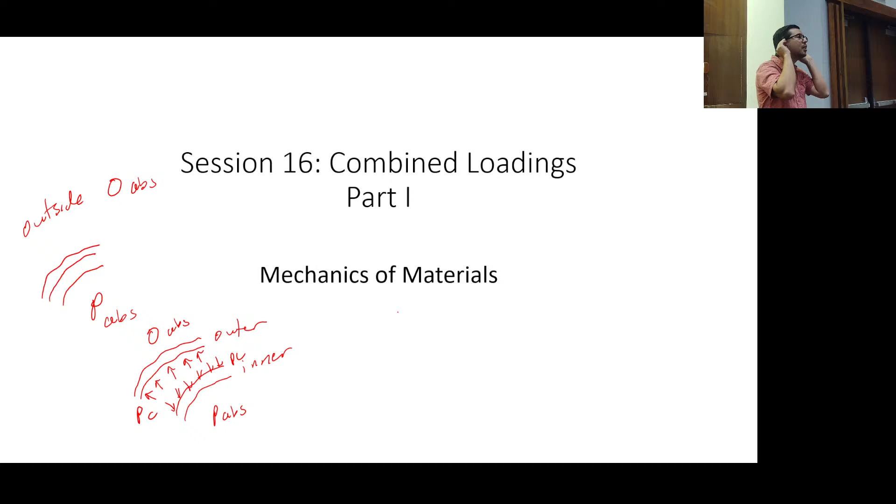Why didn't you take the absolute pressure on the inner cylinder and subtract the PC from that instead? Good question. That's where it comes down to a definition of context. Or I could see you thinking the gauge pressure is really P minus PC. Well, if you had a gauge, it's going to be hard to measure that interface pressure. But I could see how that's confusing.

And that's why I'm trying to say, the way we're defining the gauge pressure, it's between the inner of this system and the outside of the outer cylinder. Good points. All right, any other questions? All right.

I like that word, all right. And I like ums. We have maybe one of the hardest conceptual lessons today that we're going to cover. Again, it's okay if this material looks a little bit new, it's okay if we don't get it right immediately. We can discuss it in further detail, and as I post some of the videos for the examples, some of the concepts will be simpler.

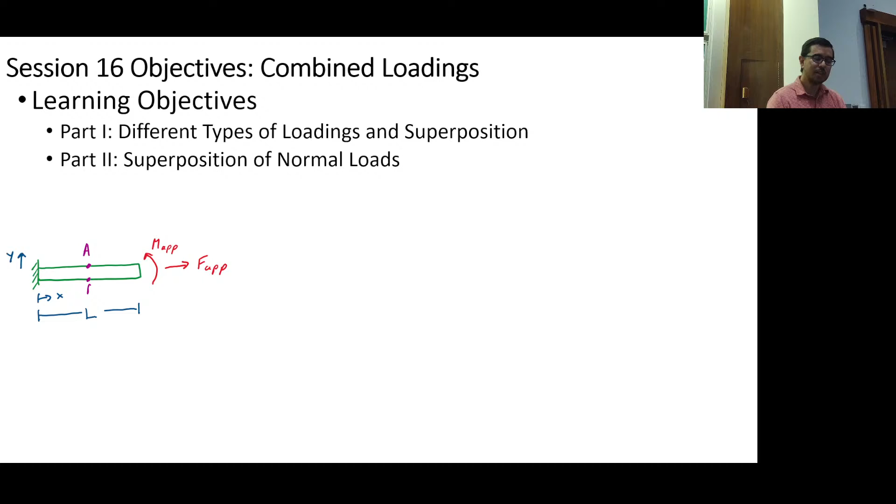It's a key session though, because what we're going to do today is combine the different types of loadings we've been looking at, using superposition. We're going to be looking at normal loads, shear loads, and normal and shear loads together. This session doesn't necessarily tell you will it break or not, that will come later. All it's trying to do is figure out what the tensor looks like at a given location.

The stress tensor is what I'm talking about. So today we're saying, I know that a bar that's uniaxially loaded has one sigma, one normal stress, one axial stress, right? What we're saying is now when we put multiple loads on that bar, or on a structure, it's not just sigma x. You already knew this, you already knew beams are going to have transverse shear stress potentially and some bending moments or bending stresses. So you already kind of knew this. Today is the time where we formalize it.

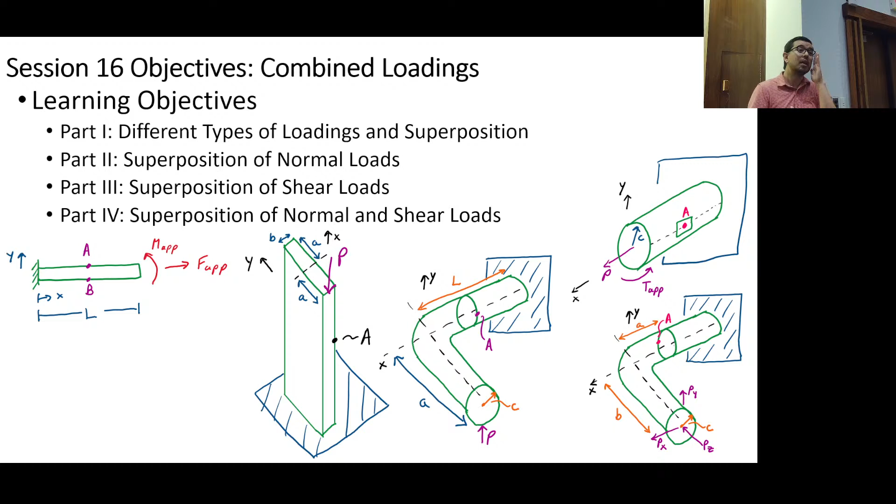So our goal is to essentially populate the stress tensor. I don't really say that explicitly in the slides, but that's maybe one way to say it. So let's check them off: do I have sigma x, sigma y, sigma z? Do I have tau xy, tau yz, tau xz? There's essentially 6 options, and most of them are going to be zero, because we're still kind of working in 2.5D. The goal is to figure out how those individual configurations with loading and geometry end up resulting in the particular stresses that we care about.

And so these are some drawings of the types of systems that we're going to be analyzing. You're like, hey, these don't really look that different than what we've been doing. And they aren't, you've pretty much, I mean, maybe this one right here.

Let's see, maybe this one, like that's not working. Come on. Why is that not working? I think I know why it's not working. Hold on.

Okay, maybe this one right here looks a little bit different, but these others are pretty straightforward in that we've dealt with them. This one is a little bit different because it comes off at a right angle. But that's a configuration we'll go into.

So you have, the answer here is either normal stress or shear stress. Okay, so tau xy, tau yz, tau xz. That's it, we have normal stresses and we have shear stresses, or we have both. So back to this question: if it's a torsionally loaded rod, what type of stress are we dealing with?

Exactly, okay. This is not going to make it, this has too much wind resistance. All right, so maybe Brennan, if you can pass it over. Oh no, all right that was way off, I thought I was doing better. I haven't figured out those, but I hope he can make it over to you. All right, and then what else? What else? Oh, you have good aim, you should be doing this. All right, what else?

Yes, okay so distributed, yeah that's a distributed load, right, is going to be for a wide variety of systems. That could be on torsion, on a rod, okay, that could be on a beam, it can even be on a bar, right. We saw how gravity affects our integral of p dx over EA, right? So that's kind of a type of external loading, shall we say.

Okay, that's fine. Yes Michael. Axial loading, huh? Axial, okay we already said axial loading, okay that's okay, give me another one though. Twisting, we already said twisting. Okay, pressure, yes like a pressure vessel, yes that's kind of the other one we could be dealing with.

All right, so pressure in a vessel, a thin wall pressure vessel, and then what types of stresses does that induce? Not compressive usually, huh? So here, what are you going to say over here? I'm sorry, huh? No, not shear, not shear, not shear. We're talking a thin walled pressure vessel.

Who said hoop, there it is? Where, hoop? Oh, there's no way. Come on, I'm going to hurt. By the end of the class, I will be able to throw it up there, I think, but right now I cannot. Yeah, oh actually I could. Okay, that underhanded.

I have been teaching the wrong way, I see. All right, okay, so anyway. Wow, that's really embarrassing. Okay, anyway, so hoop stress and longitudinal axial stress, okay?

There's one other thing - yesterday I almost brought in some tree clippers, because I was thinking these are excellent examples of shear. I was thinking about how we talked about single shear. I think in the future you should talk about single and double shear before torsional shear, because that gives a nice example of shear stress - force over an area, giving you an average shear stress.

So those are the different configurations that we've discussed. Let's see if I forgot any, or if I don't line up with my slides here. Okay, yep, I think that was about it.

So we've actually done quite a bit if you think about it. You came into the class and we didn't even talk about stresses in another class. Now we have this toolkit that says I can calculate, at least for these simple configurations which are present in a lot of the devices and structures we see in the world, these different types of stresses.

So what we're going to do today is say, hey, what happens when you have multiple loads or a configuration that can induce these different types of stresses simultaneously. That's all we're trying to do. And then we got to keep track - it's really an accounting problem. We got to keep track of the different types of loads.

If we go back to the first class, we said that if we had a bar, and if we also talked about beams and rods, we figured out, hey, what's the maximum supportable load? We didn't go into any of the physics or the calculations of stress - we just said, this is the rule for now, we'll explain why.

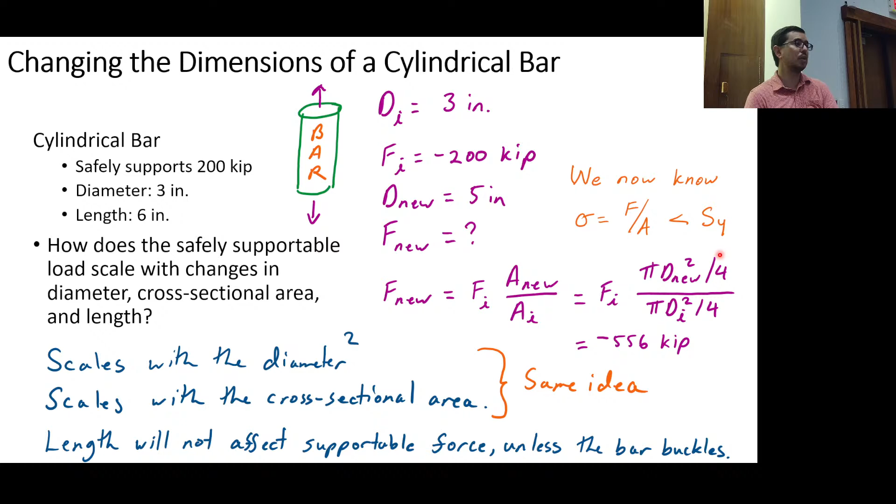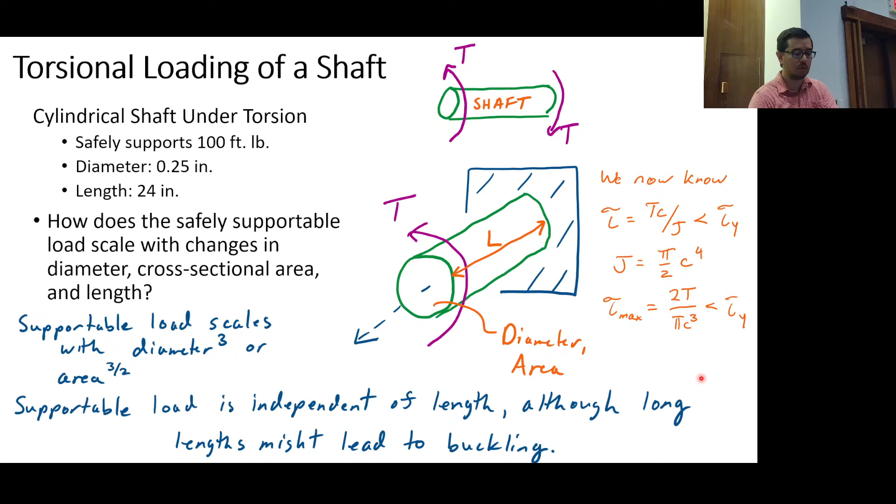And if we're considering the max, and we know it's cylindrical, then we can calculate J, that's pi over 2 c to the 4th. We can get another equation there - that's also got to be less than the shear strength.

For transverse loading of a beam, we said this in the very beginning - we had that the supportable load scales with h squared, scales with b, and scales with 1 over L. We now know that sigma is equal to negative my over I, and that has to be less than the yield strength in order for us not to have any yielding and not to have failure.

And we can break that down a little bit further, and we can say, okay, this is what the sigma max would be for the system where we have a force being applied on the end. Notice I didn't say anything about the...

transverse shear strength here, or the transverse shear stress, because as we described in the assignment a couple classes ago, that typically is much less. The shear stress is typically much less than the bending stress. It has to be a very narrow or very short beam for us to be thinking that shear stress is going to dominate the failure.

So coming into this, we can see that the supportable load does in fact scale with h squared. We see it in the denominator here for the sigma max. The supportable load does in fact scale with b, we can see it here. And the supportable load does in fact scale with 1 over L. If we increase L, the bending stress is going to increase and we get closer potentially or exceed the yield strength of the material.

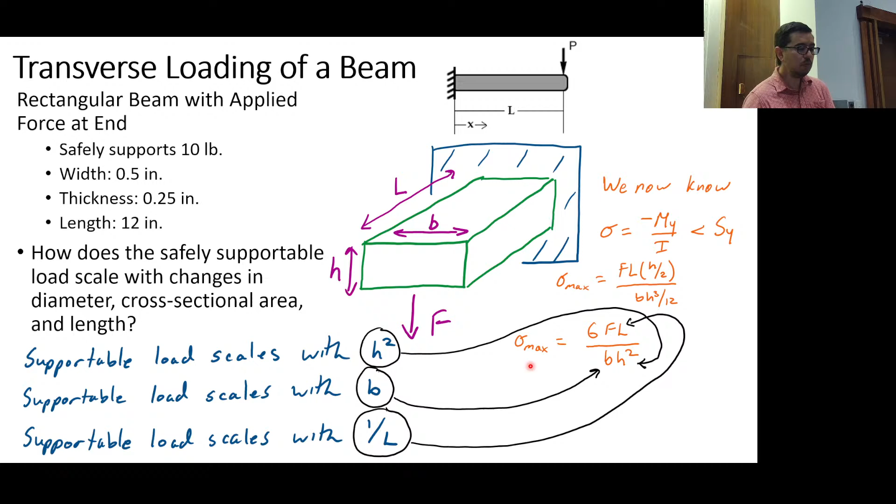We've also spent some time on superposition. Now the superposition we were talking about has referred mostly to combining forces to figure out what the combined displacement might be. Of course, you can also combine forces, especially if they're in the same direction at the same location, to figure out how you would add the stresses together too. Today, maybe it'll be a little bit more clear on how we handle situations where we're adding another load somewhere else, and we use superposition to figure out what the new stress is, right?

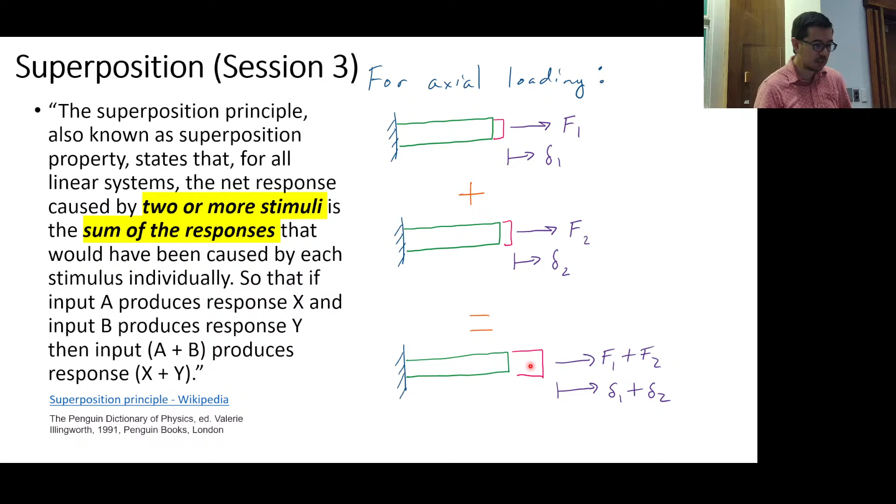So here, let's just kind of review and take a look at what Hibbeler instructs us in terms of superposition of forces and stresses.

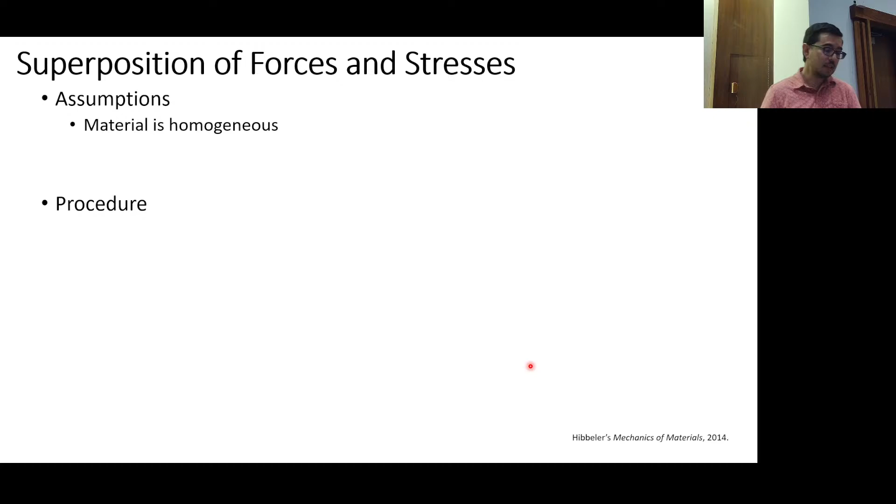We're making some assumptions. One is that the material is homogeneous. Another is that the material has a linear elastic modulus, and we're also kind of making this assumption that the deformations are small.

And so the kind of classic example of where beam bending fails is for large deformations. Let me see if I can get this to work. If we have something like a beam and we're loading it with a force P on the end, right? We're saying that P is more or less going to be vertical the entire time we're doing this loading.

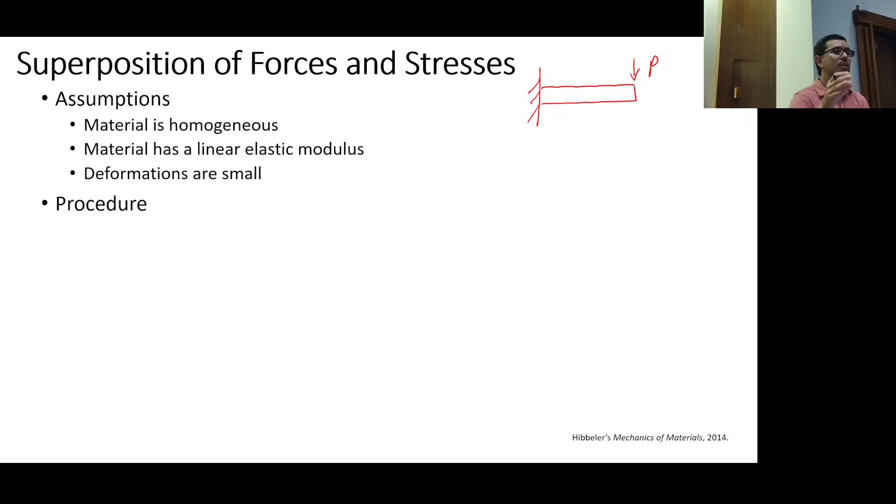But later, when we do beam bending and stuff, we can calculate the deflection. And if you have something that ends up looking like this, well, that's really bad. You have questions: is P still going downward? Is it still vertical? Did it go with the end of the beam?

Okay, these types of questions affect the answer you're going to get. They affect the linearity of the results, and they also affect the assumptions and the mechanics we use to derive either the deflection equations or the stress equations. So for large deformations, there are analytical responses, but again, that's where simulation might play a beautiful role as a tool. We're sticking to the simple configurations.

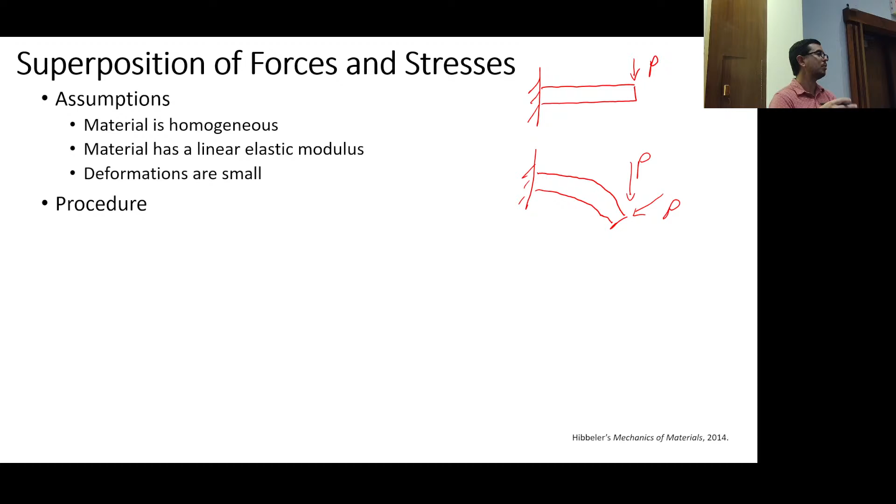As you already know, these simple configurations are enough to keep us busy. The general procedure has been to use the method of sections. Right now, method of sections is everywhere. It's in the pressure vessels, it's in the bars, it's in the rods, it's in the beams, it's in the trusses. Method of sections is critical to being able to understand what the internal loading looks like.

It may still seem weird to have this internal force, or weirder or stranger or more difficult to understand the internal bending moment. The thing is just to back it out, even if it's conceptually a little bit difficult. Just take a breath and take a look and say, I need equilibrium to be satisfied. I know what external equilibrium looks like. Just pretend you're doing external equilibrium, but with a slice.

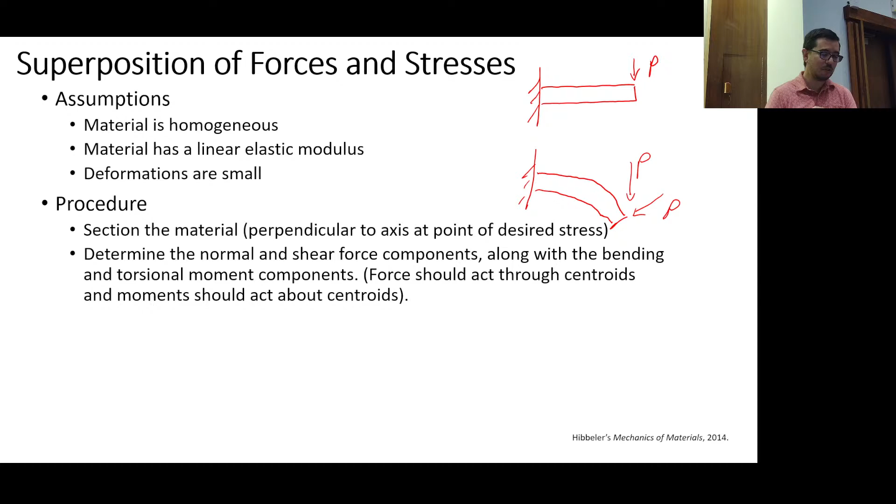We have to determine the normal and shear force components, along with the bending and torsional moment components. Forces should act through centroids, and moments should act about centroids. We'll talk about actually a counterexample to this force acting through a centroid in a second. We've got to determine individual normal and shear stresses for each type of loading: normal force, shear force, bending moment, torsional moment, and thin-walled vessels.

Okay, so we've got this whole toolkit now, and we look at a problem and we're like, okay, I now know what type of system I'm dealing with, and I can go ahead and figure out the internal stresses. And now you've been waiting for this for a little while, but we can finally add the normal stresses to each other. Okay, so you're like, phew, finally.

You're telling me, because I've been saying, be very careful with equilibrium, right? So what we're saying is, if you're at a given location, you can add those normal stresses to each other if they're in the same direction. Would you add a sigma x and a sigma y together? Of course not. Do those sigma x and sigma y have an effect on whether or not the material will yield? Absolutely. We haven't gotten to that step yet. But if it's at the same location, in the same direction, and the same type of stress, we can add those to each other.

Would you add a tau xy and a tau yz to each other? You might think about tau xy equal to tau yx. That is true. But when we do superposition, we've got to make sure that these stresses are the same type and in the same direction and at the same location, or on the same face.

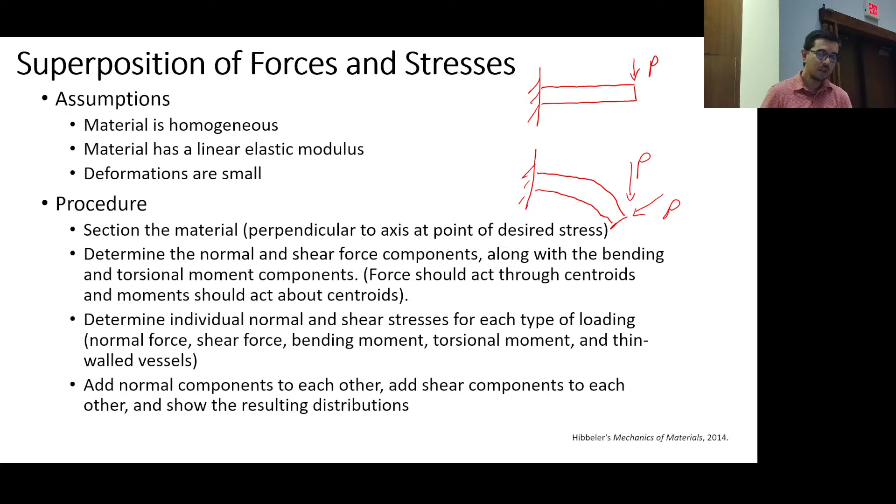So let's do a little bit of true and false. Statement number 1: a bending moment and axial force might both contribute to a normal stress. Is this true or false?

Yes? True, it's true. And I didn't say how is that? Why don't you explain that, Mark? Well, an axial force already, in its nature, contributes to a normal stress, and then a bending moment creates a bending stress. Yeah, that's right.

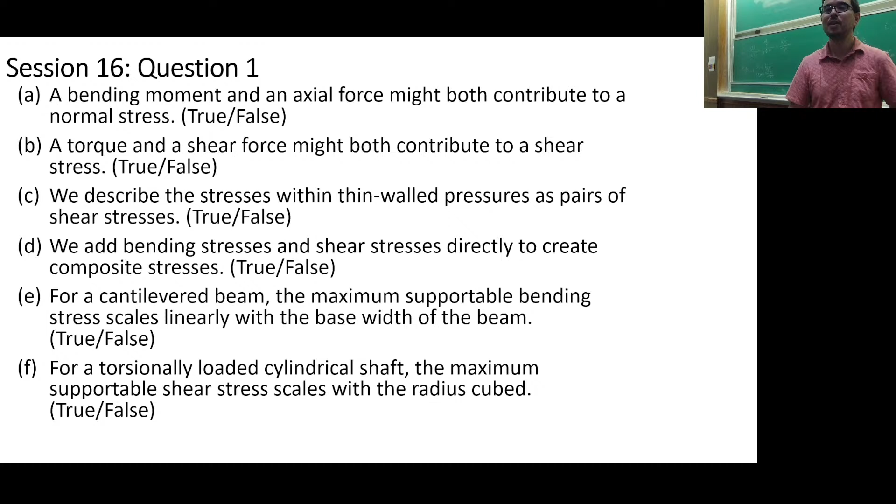This is the penultimate, all right, so I only got one more. A torque, so this is true, let's just mark that down as true. Okay, so that's true. A torque and a shear force might both contribute to a shear stress.

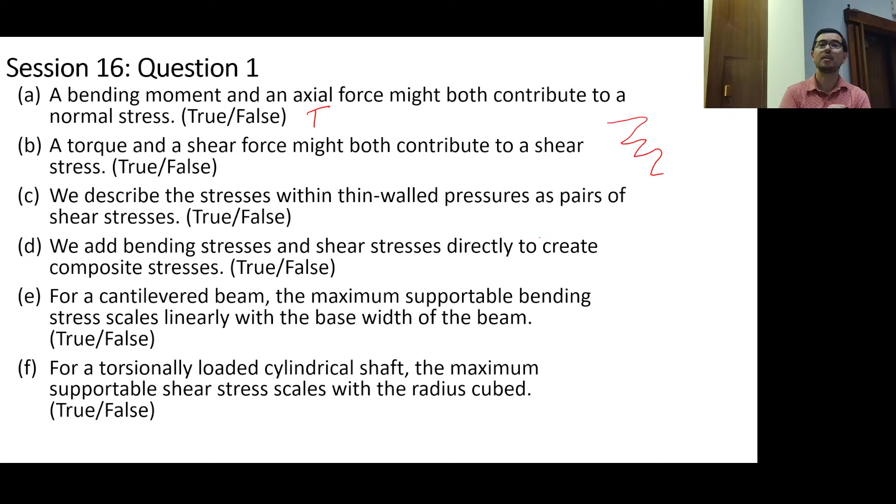Yes? What? How so, Stephen? We already know that shear force will produce a shear stress, so even if the torque doesn't produce any component. Okay, good.

Okay, we describe the stresses within thin-walled pressure vessels as pairs of shear stresses. That's false. Who said that? Okay, yes, thank you.

We add bending stresses and shear stresses directly to create composite stresses. What's that? Also false, right? Okay.

For a cantilever beam, the maximum supportable bending stress scales linearly with the base width of the beam. True, right? We just said that. And for a torsionally loaded cylindrical shaft, the maximum supportable shear stress scales with the radius cubed. We also just said this, so this is also true.

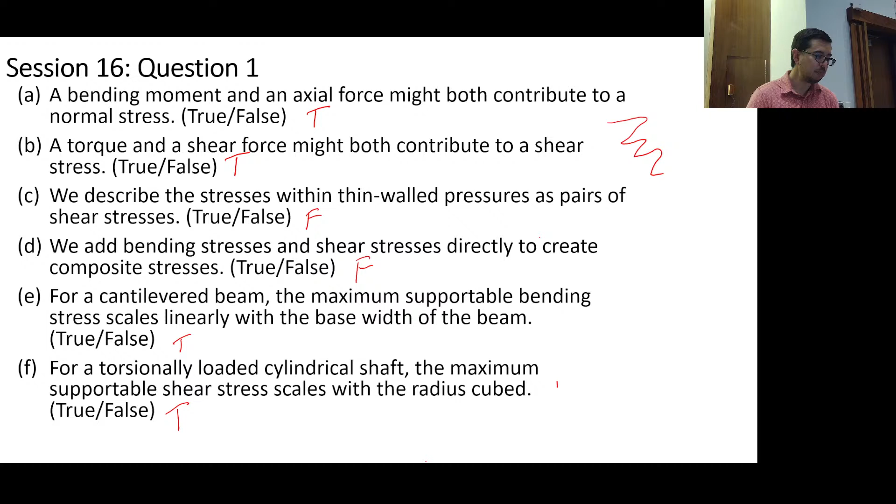Okay, so that is also one of your homework questions. But these are some of the things that we've learned. And I think it's occasionally good to look back and say, hey, the class is ripping along, we're at session 16. And do you know how many sessions we have in this class? 25. All right, so we've crossed the halfway mark. It's exciting.

Okay, so let's look at superposition of normal loads. This might be simple, it could not be, we'll see.

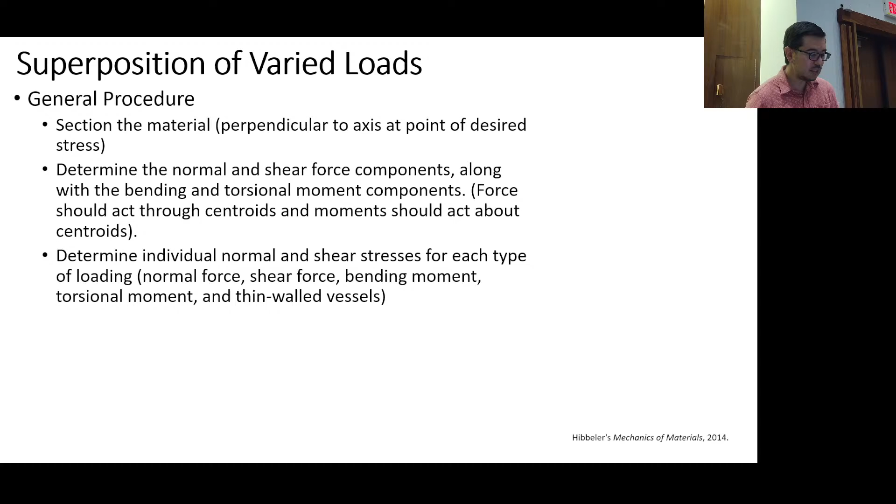The general procedure is that we section the material, we determine the normal and shear force components, along with the bending and torsional moment components. We determine individual normal shear stresses, and add the normal components to each other. So our possible sources of normal stresses are bending moments, normal force, and thin-walled pressure vessels. These are our options.

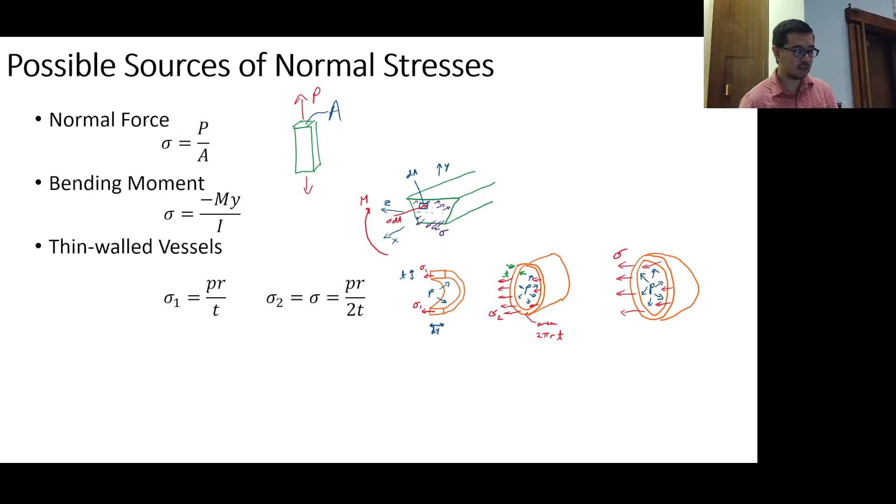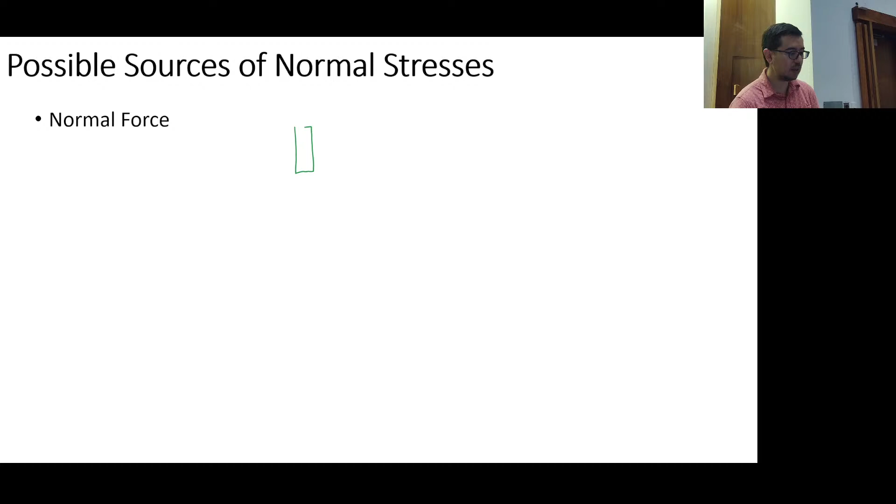Okay, so before we even do this problem, let's just use the think method.

Has anyone ever watched The Music Man? It's this musical. Anyone? Come on, there must be some people. 76 trombones? No? Okay, quick synopsis of this movie musical. A salesperson comes to town and doesn't know a thing about bands or band instruments, but he just wants to sell instruments to all the people, make the money, and leave town quickly. But for a variety of reasons he ends up having to stay a while, and he has to teach them how to use these instruments even though he knows nothing about music. So what he says when they get together for rehearsals is we're going to use the think method. So what we're going to try to do - not that I'm a charlatan, hopefully - is we're going to try to use the think method here.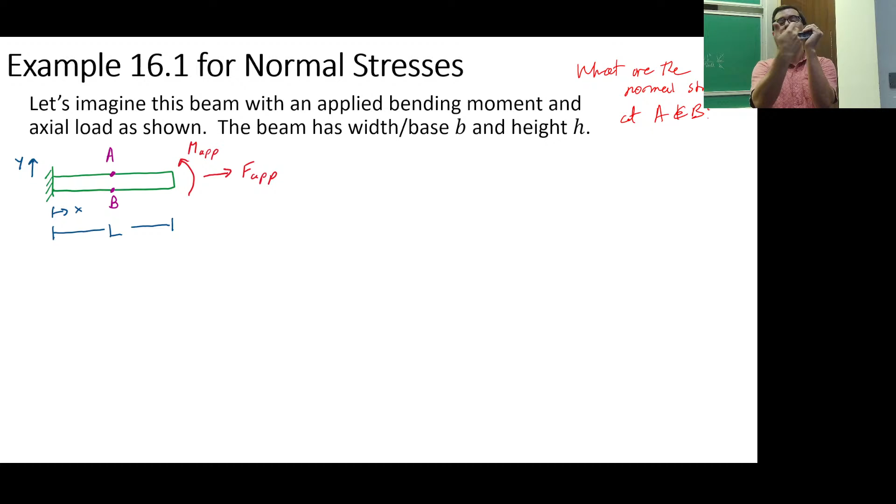B, on the bottom - that's simpler now because we've done the top, right? B is going to be under tension in both cases. You can see that: I'm pulling this thing apart, so it's going to want to be in tension. I'm causing this bending moment to cause the different material elements on top to get closer to each other, and the different material elements on the bottom to get farther apart from each other.

Okay, so before - that was not a good idea. Before we even do any math, we kind of got an idea of what we're going to have to add and what we're going to have to subtract, or what we're going to have to add appropriately, and this is superposition.

So if we take a look at this cross section and we draw it like this, we can say okay, there's B, that's the base or the width. If we're doing transverse shear stress, which we're not right now, but if we were, that B would be a T, which would be thickness - but that's just how Hibbeler calls it. And H is the height, which I think of as thickness, but H is height.

And if we want to talk about the internal bending moment, we take a slice, like we do here. And we also are a little more careful in this case. Let me see if I can be more careful too. Okay, we have our N.

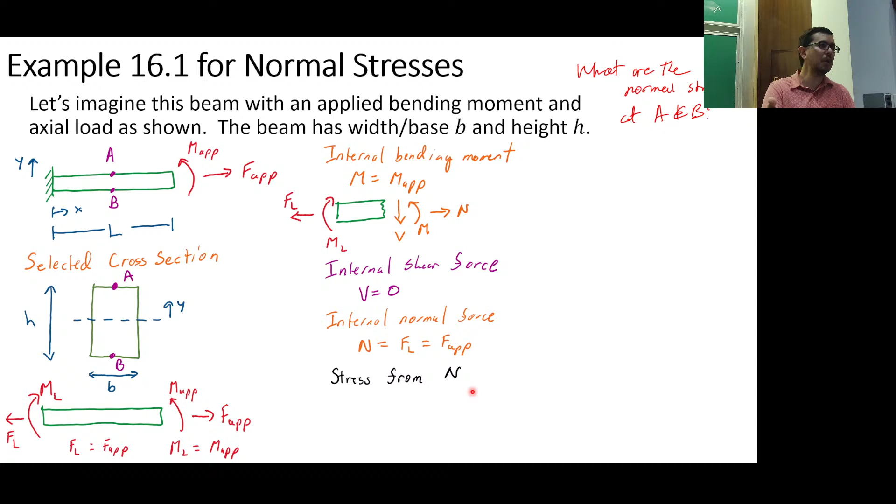So now let's start to think about the stresses. The stress from n—remember it's usually a good idea to think about these stresses in terms of internal loads. Of course we can equate them to the external loads, but we're first trying to figure out what the internal loads are because the stresses are internal as well. So we get the stress from n, and that's going to be equal to what you could call sigma NA or sigma NB.

That is, we're doing some averaging here. So yes, could there be some edge effects on the top or the bottom? Yeah, there could be, but for our intents and purposes, as long as we're not in the air above the beam but we're in the beam, we're going to say those normal stresses are going to be the same. And what are they?

Algebraically, what's the equation here? What would it be? Force over area—yes, and that would be the axial stress. Yes, and specifically for this problem, the N, which is equal to the FL or FAP, and the area base times height—that's right, that's it.

So we have N over A, and then N over BH, and the N is equal to FAP. Okay, so stress at A from the bending moment.

This is going to be using the flexure formula, which is negative My over I. Y in this case we're going to say is h over 2—that's the distance to the outer surface from the neutral axis. And I is going to be equal to bh cubed over 12. And this is going to be under compression.

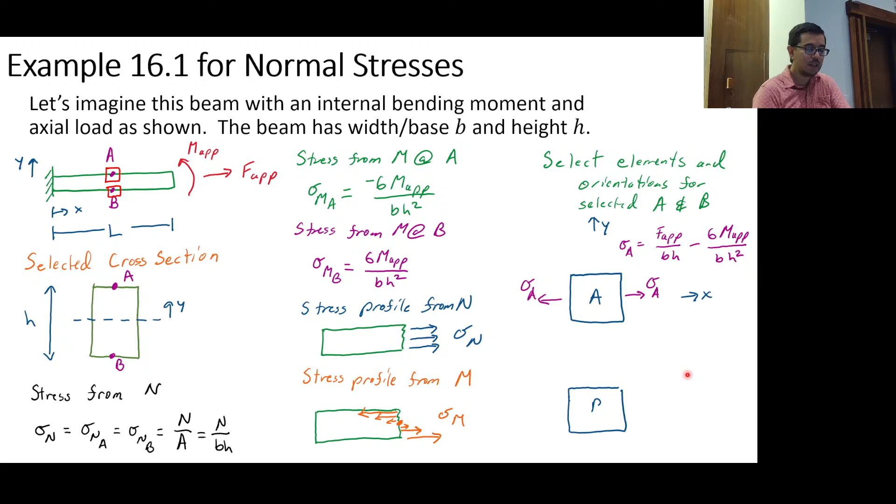It's almost like we're overcomplicating this. All we want is that it's going to have a positive contribution from FAP over BH, and we're going to have a negative contribution from the MAP, which we described here. At B, we have sigma B, and we're going to have them both adding to each other. I was kind of making fun of my own drawing here, because it's kind of trivial — it's just uniaxial, it's in one axis.

But these drawings are going to become very important when we have more complicated structures. So we want to do this. Any questions? Is this clear? This is pretty straightforward, I think. Well, maybe I shouldn't say that — but any questions on this?

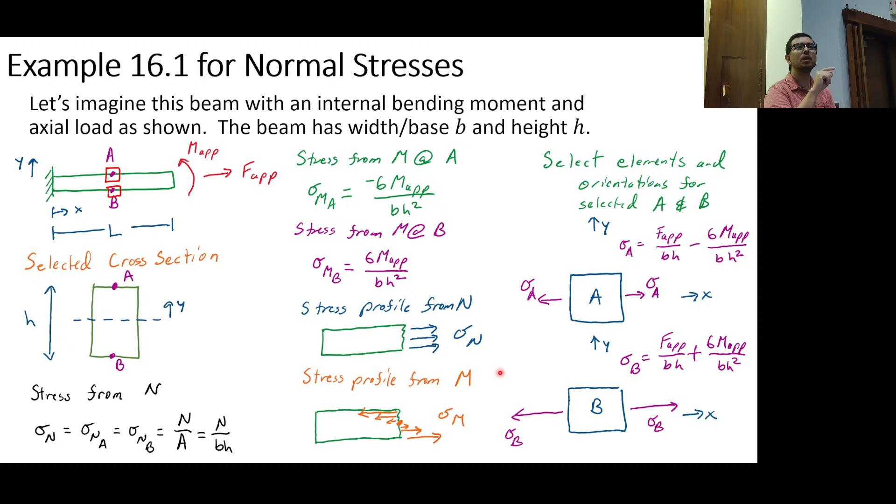All right. Well, let's keep going.

So this is the second question on the homework, and it's asking us to determine the normal stress along the x direction. So this is x coming out, axially going here. We have a force P not acting at the centroid.

So this is off axis, and we're making some simplified approximations. This point A is on the outer surface, on this edge. It could be over here, it could be over here — we're making some approximations here. We're not going to say... yeah, I mean maybe it'd be better to put it in the middle here.

I'll explain why that is in a second. But we're trying to figure out what the state of stress is at A. Before we even do this problem, if we use the think method — what's the state of stress? This normal stress, what kind of stress are we expecting out of this problem? Before we do any algebra, before we do any equilibrium, what type of stress do we expect to have there?

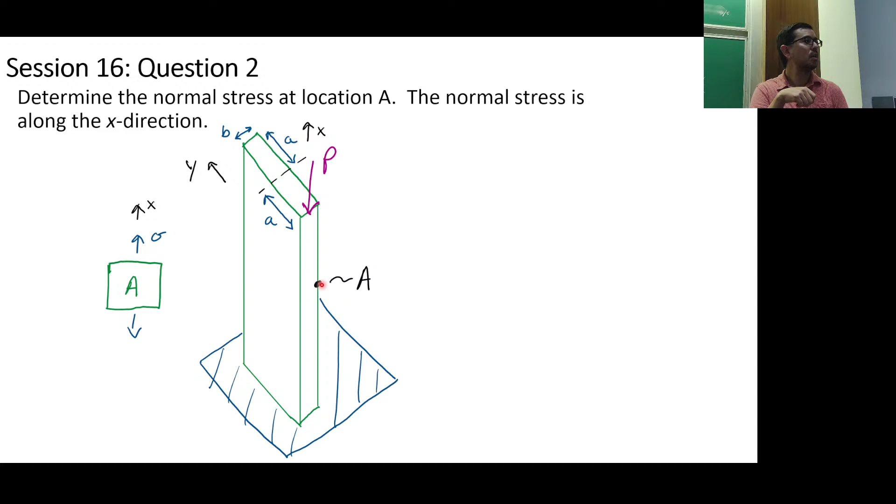Okay, that's good. What else can you tell me about the type of stress we're going to have? At point A, because of the way the stress is, it will make it go like this. Hold on, at point A, what do you mean? I don't know if I understand what you're gesturing. It's squishing it. Okay, squishing it, I understand that.

So it's stretching A, I believe. Is it stretching A? If it's— you said squish. When you said squish, wouldn't it go like this? Oh, you think it might be buckling outward or something? Yeah. Okay, so we're not talking about buckling here, all right, it's just basic using what we know. But you said squish — when you say squish, do you mean compression or do you mean tension?

It'd be compression. Right. So the other thing is that, look, there's a force coming down, pushing down, and it kind of seems to make sense that that force is going to be compressing it. And then the way this is working with the eccentric loading, there's a moment being applied — that also seems like it would cause this side to bow out, and this side to kind of curve in. So from both of these scenarios, it looks like point A is going to be under compression. Does that make sense? Okay.

Why I should have put A on this midpoint instead of here, because this could also be off-centered in the Z direction as well, X, Y. It could be like adding an eccentric loading that's B over 2 for the thickness, but we're going to ignore that since B is much smaller than A. Would that put A in tension? Yes, it would. Okay, but I'm looking at the larger contributions, and B is much smaller than A.

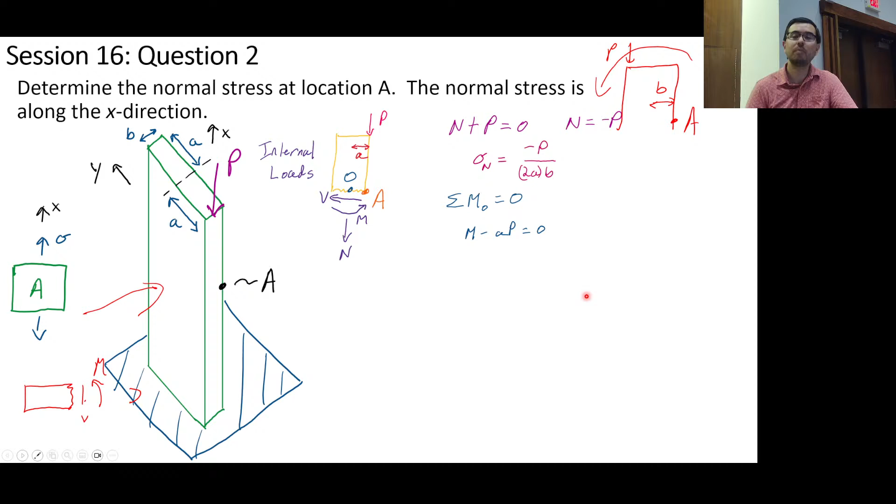Okay, so moving on. Once we have our internal forces outlined here, or internal loading, because M is not a force, obviously, we can write out that N plus P is equal to 0, so N equals minus P. And we can say that the normal stress is going to be equal to minus P over 2AB, right? That's because we have A and A, so that's going to be 2A. And we have the summation of the moments at O, so we're going to specify that location, as equal to 0, and we have M minus AP equals 0, so M is going to be equal to AP.

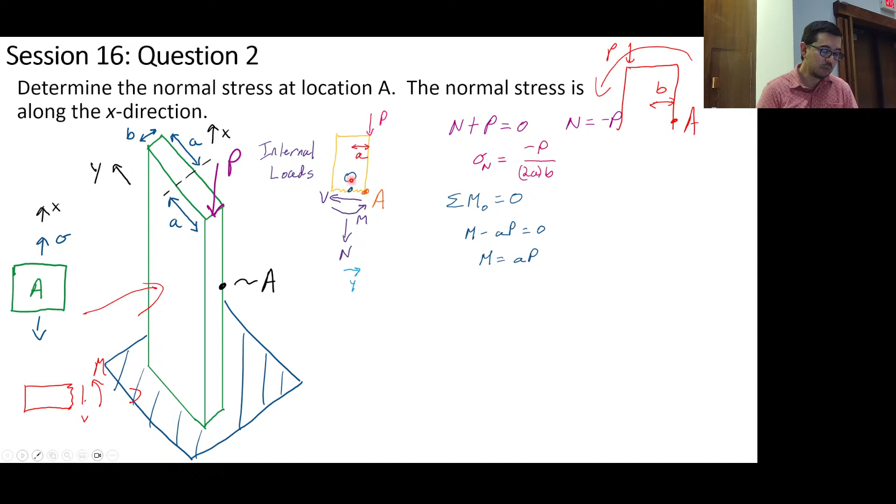So in this case, the Y direction would be going from the middle to A. And that means that when we do the sigma M, we have negative My over I, and we can then write that minus APA over this quantity I gives us a bending stress of minus 3P over quantity 2AB.

Can you explain the 2A times B for the normal stress? Sure. So because this is the entire height, right? This is the problem with putting points at the edges, I guess. Because what we're assuming is that, at least from the axial normal loading, the stress is going to be the same across the whole cross section. So if I had just put P in the middle here, then I would just have P over the area. What's the cross-sectional area here? Exactly, that's all, all right? So essentially what we're saying is 2a is equal to h as well when we do the bh cubed over 12.

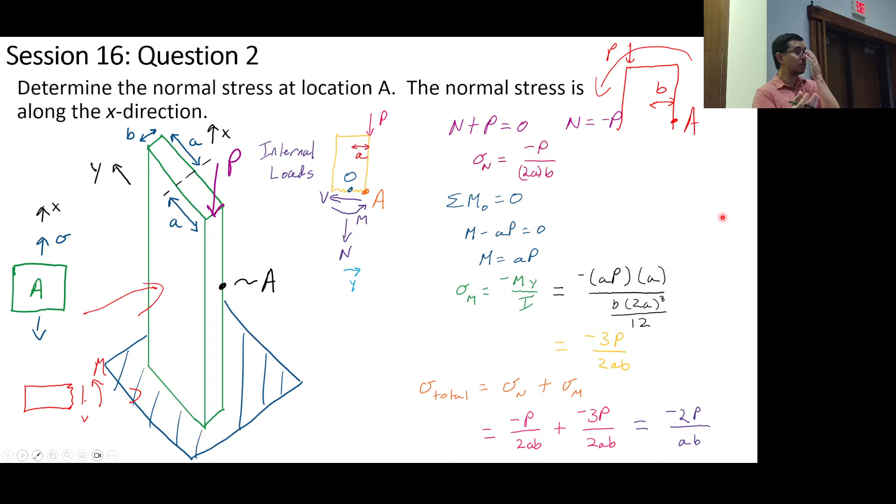So we get that quantity for the stress due to the bending moment, and we have that the total is going to be the sigma N plus the sigma M, and we're going to get that it's just minus 2P over quantity AB. All right, any questions? So this is how you can calculate and add normal stresses to each other, when one is caused by axial loading with a force, and the other is caused by a bending moment.

I see people writing things down. Questions?

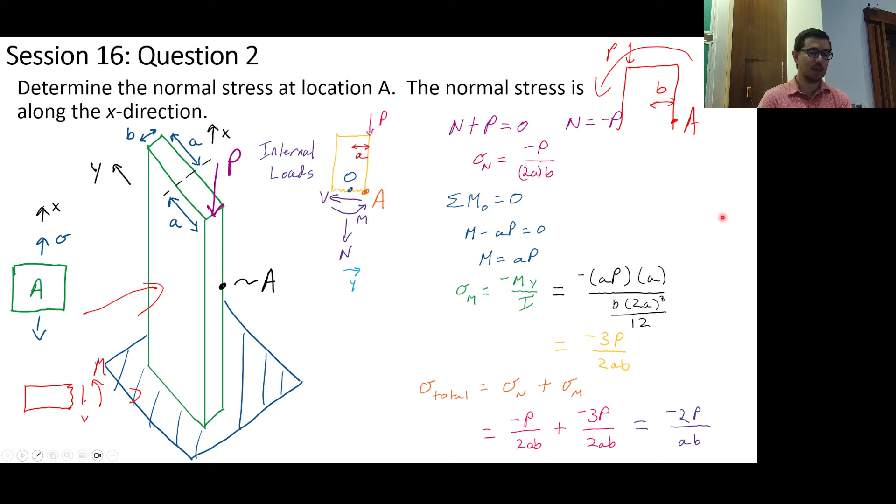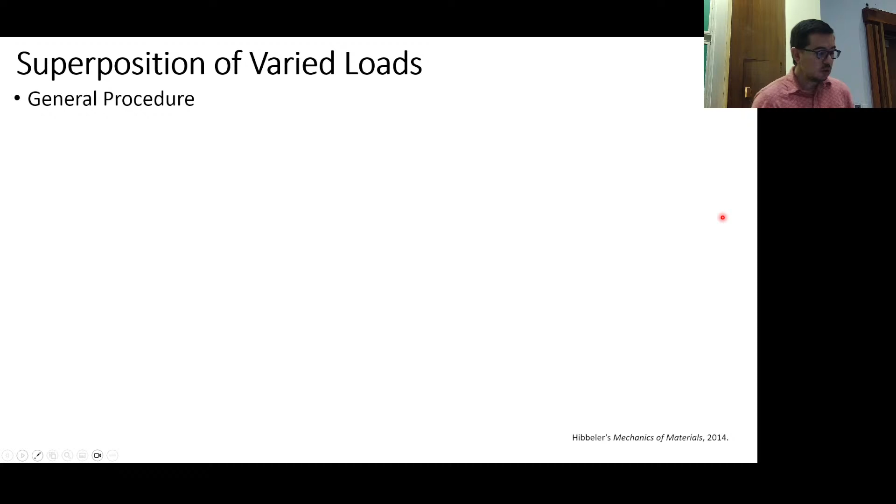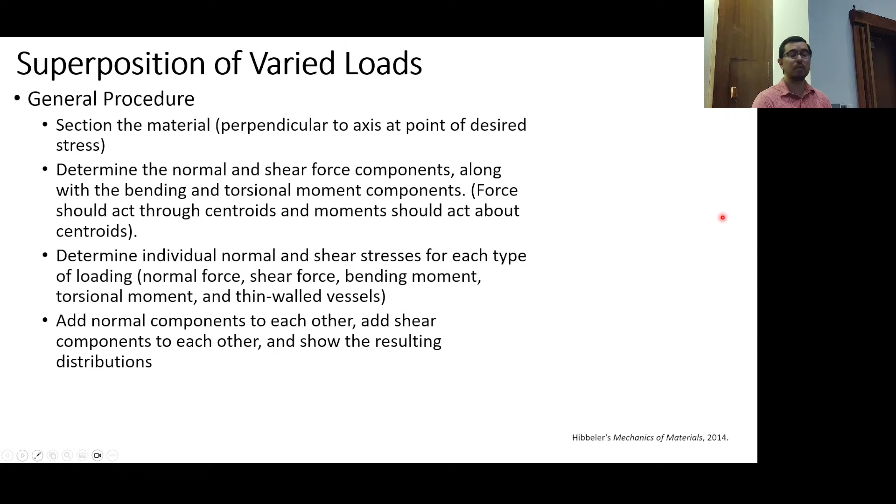Now the next thing we're going to talk about is what happens with shear stresses and shear loads. So once again, general procedure: section the material, determine the normal and shear force components, along with the bending components for moments, and then we're going to determine the individual normal and shear, and add the normal components to each other and add the shear components to each other, and then show how this looks at a particular location. What are the possible sources of shear stress? Well, you have the pure shear because of simple, single, or double shear, and we also have the transverse shear stress.

Okay, so those are kind of two of the ways that it can be looked at, and then third is thinking about the torsional, the twisting that can take place.

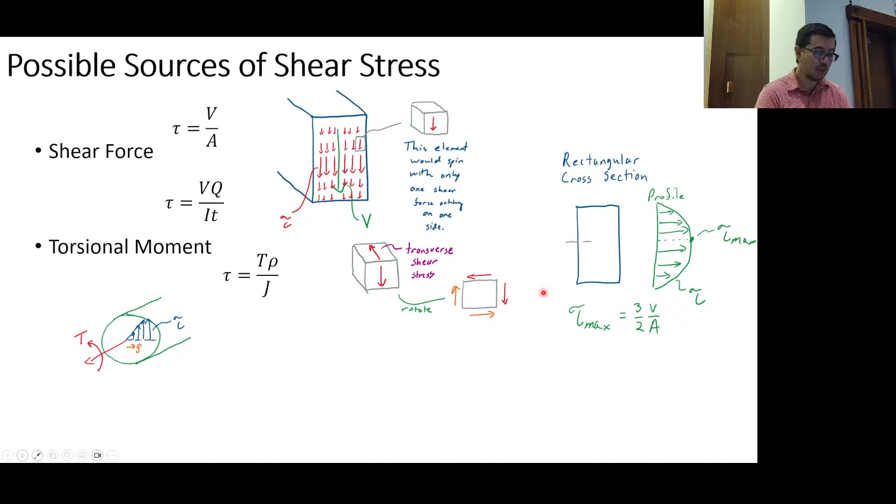That's out of order. But for transverse shear stress, we also know that you can figure out the maxes for transverse shear stress and bending, and it's going to be 3/2 times the average shear stress if it's a rectangular cross section, and 4/3 times the average shear stress if it's a circular cross section.

So let's clarify this a little bit. All of this stuff is for transverse shear stress, and of course, this is for the torsion.

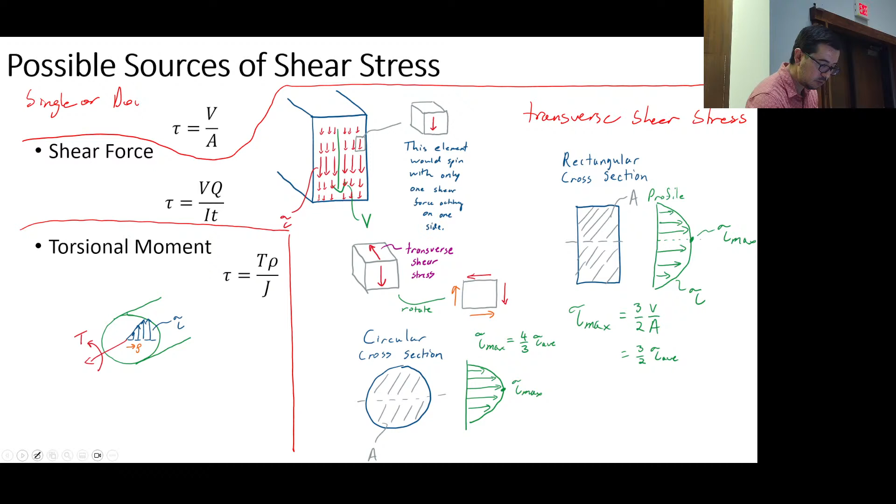Okay, let's do this. And this is kind of like single or double shear, would be kind of this situation.

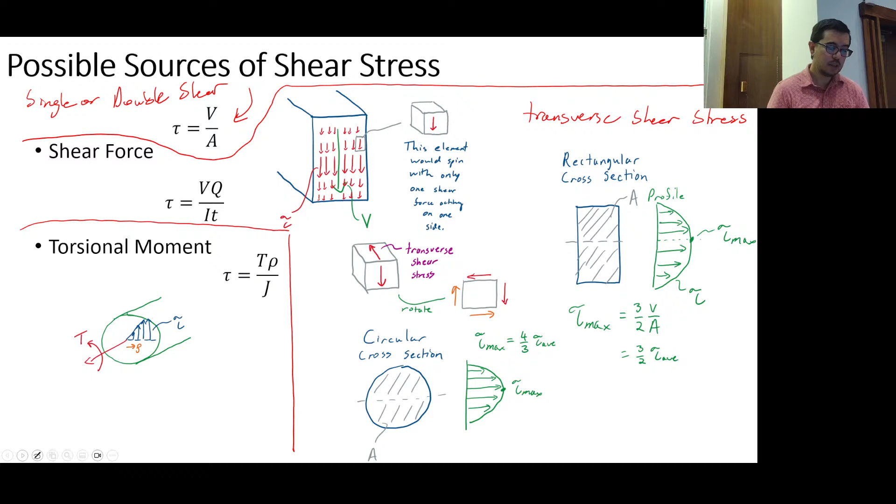We're doing shear. What can you kind of say? Which direction do you think the shear might be acting? Which direction would the shear stresses be acting? And how are they being induced? Hold on, Michael, and someone else, let's see. Some ideas, some guesses.

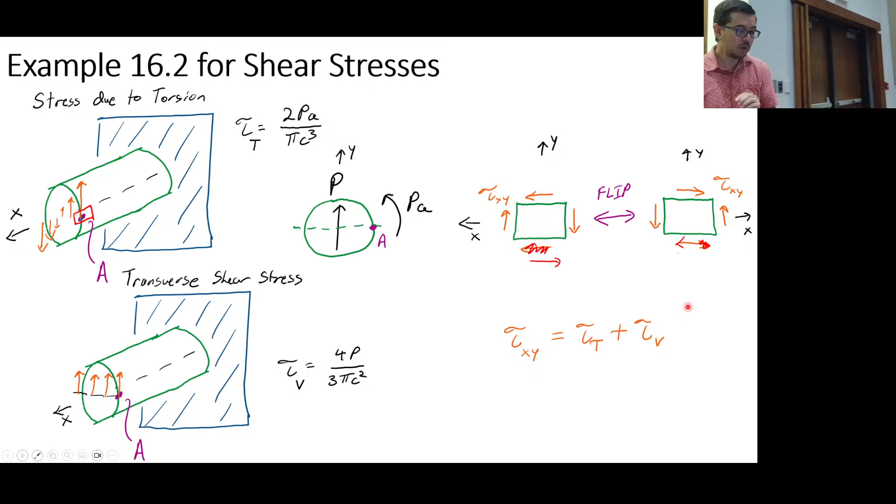For the bending part, not the torsion. The part where the bar goes out like this, is that all raising like this? So what do you mean? So if we go back, what is your question? At that image, I know it's raising this way, but at the intersection, is it also raising this way? So this force, is it going to cause this point right here, where the laser is, to move up? Well, I have a feeling that, but also would it cause like that?

Yeah, so this is going to go up as well. It's causing a twist, right? So we haven't talked about deflection here, but you know that the angle of twist would be TL over JG. So you could figure out what the angle of twist is here. Assuming this doesn't bend, but of course it probably would, if it didn't bend, you could figure out how much vertical displacement you have just because this region is twisting. It would be TL over JG for that matter. The angle times radius gives you displacement.

Okay, other questions? What does T equal to A? Say that again? This one? Tau? This is the torsion formula, TC over J. Next to it, T equals to this one? I think he means the T is PA. T is equal to PA. Oh, the torque. Okay, right.

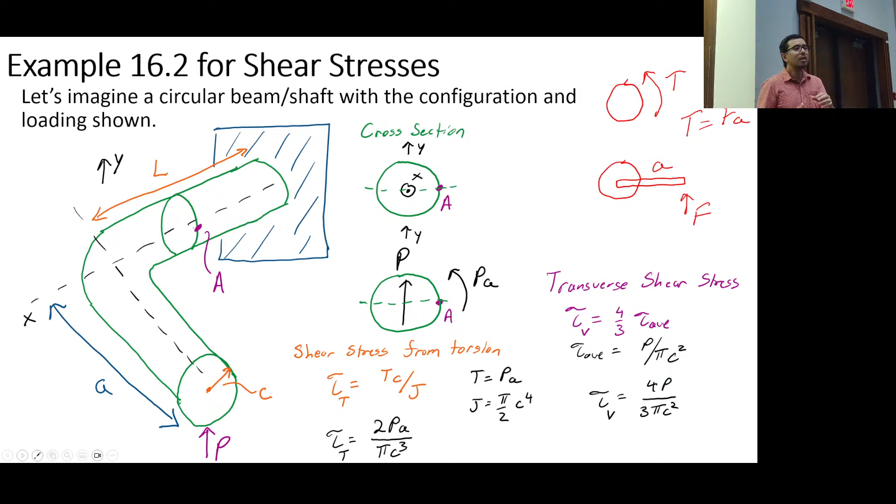We're talking about a torque that's being applied here to a shaft, and in this case the shaft is in this direction. I could try to put a screwdriver, if I'm trying to take it off, it's impossible. Unless you have an air gun, where then you're applying the torque directly on the bolt. Those guys even then have to hold it because that thing's going to whip around. Or you do it the manual way, which is you have a huge wrench that you can apply that torque with. Does that make sense? That's where that torque is coming from. Good question.

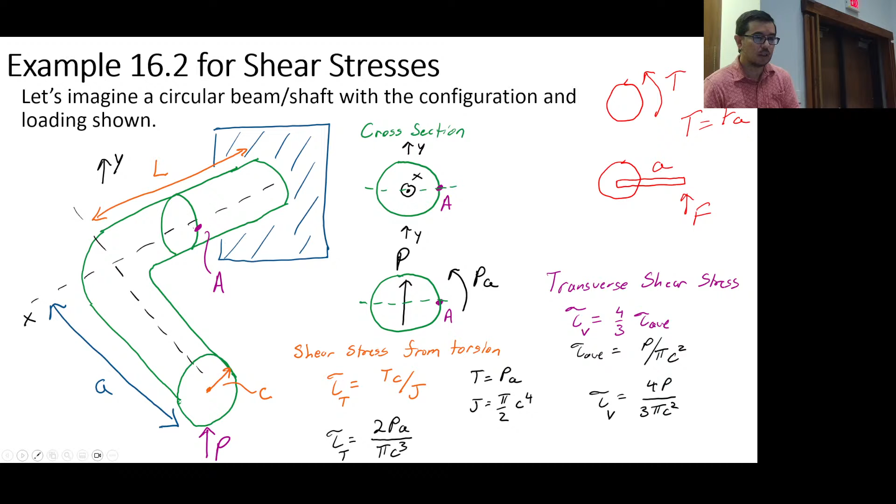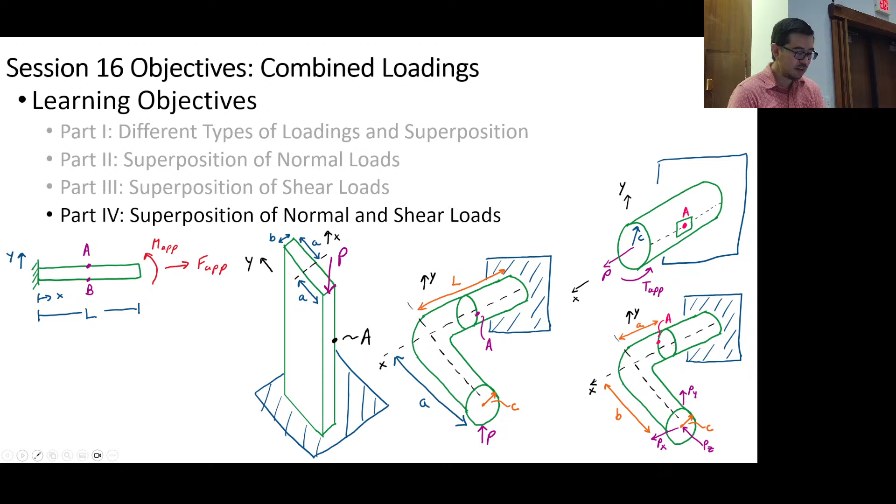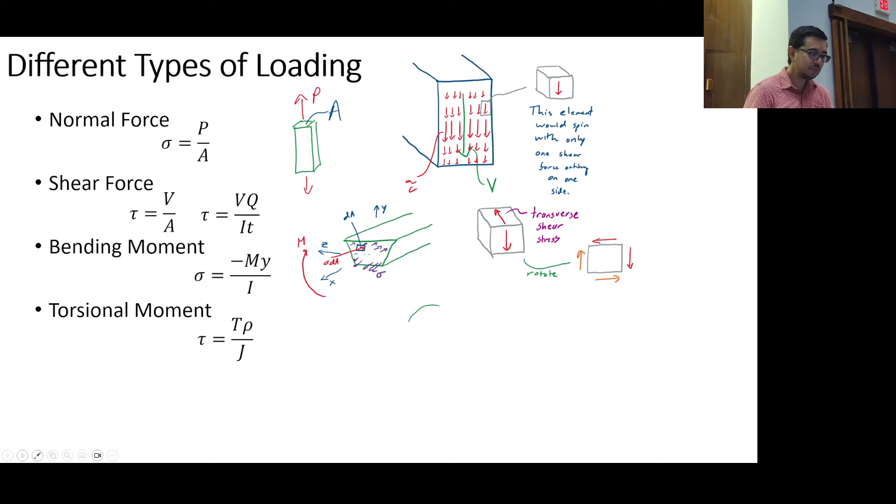My goodness, the time has flown. We're so far from being done. Okay, let's at least cover this idea, and then I had to create some other videos to do the homework. The basic method is still the same. These are the different types of loading and stresses that we're interested in.

Now let's imagine that we have this torque being applied, and we have this location A, and we have a force being applied out this direction.

Easy peasy lemon squeezy. All right, so now the tau xy, this is a little bit tricky, all right? This is using a combination of the think method and a little bit of our intuition.

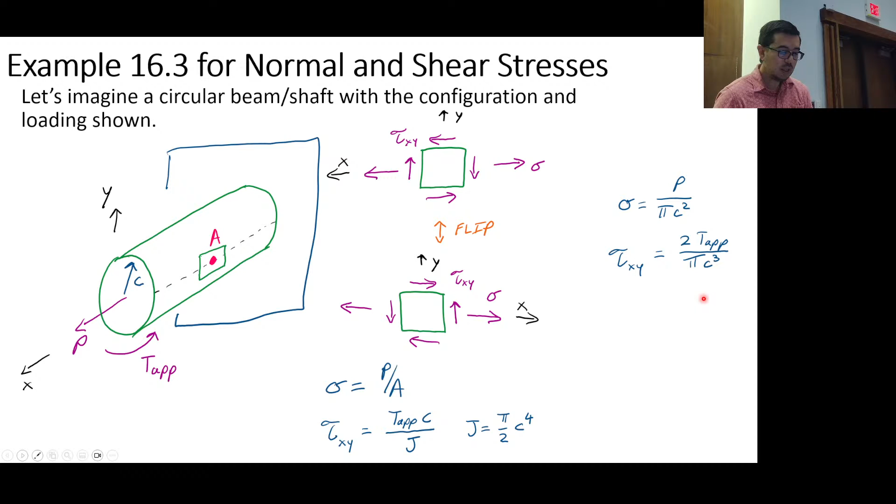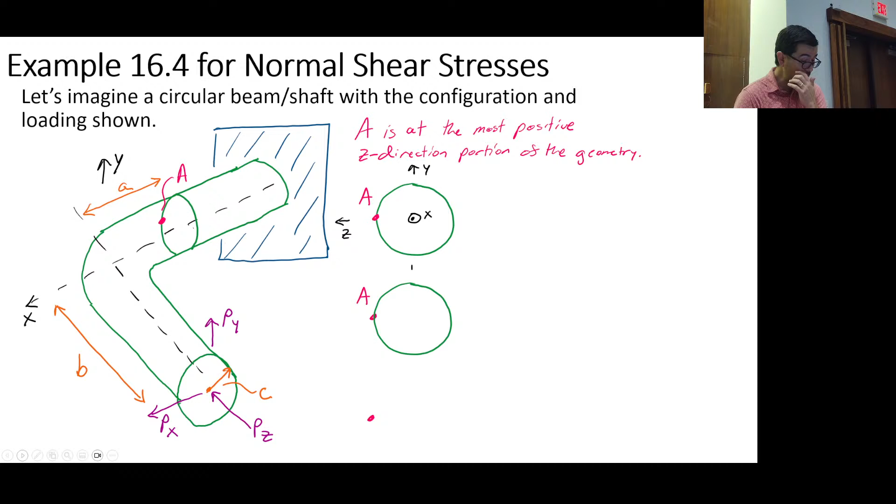There's another example, and I'll try to go through this in video, and then I'll try to go through the problem that you have as well for the homework. But we actually are pretty close to being done on this.